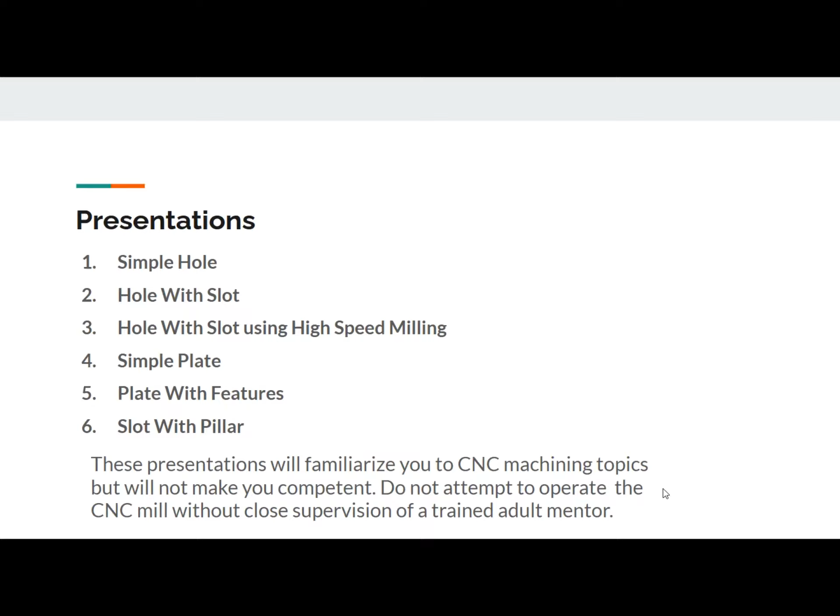So this will be a simple hole with slot. We're going to drill a 250 thousandths diameter hole, centered in a 500 thousandths slot. So the slot's going to have a width of a half an inch, and it's going to be an eighth of an inch, or 125 thousandths deep. This will be in our 2x2 block, so basically we're just adding the slot into the previous example.

We're going to use SolidWorks to add the slot to the hole, and then use SolidWorks CAM to create the CNC code with two features - one feature is the hole, and the other feature is the slot. We're then going to download and run this on the CNC machine to create the part.

So why don't we get on to the design?

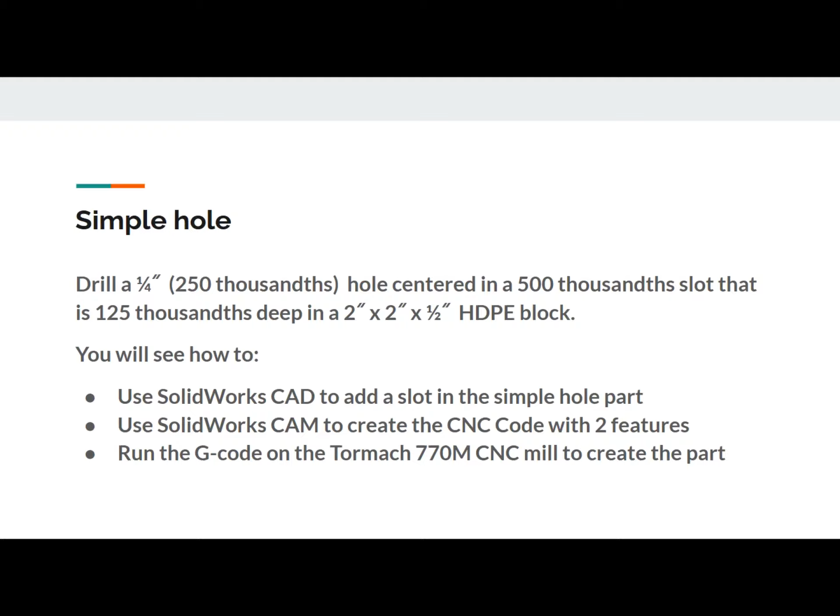We continue some simple examples on how to use SolidWorks CAD and SolidWorks CAM to create the G-code for our Tormach 770M mill. This is where we left off in the last video: a simple 2x2 block, 2-inch by 2-inch block with a 1/4-inch hole in the center of it.

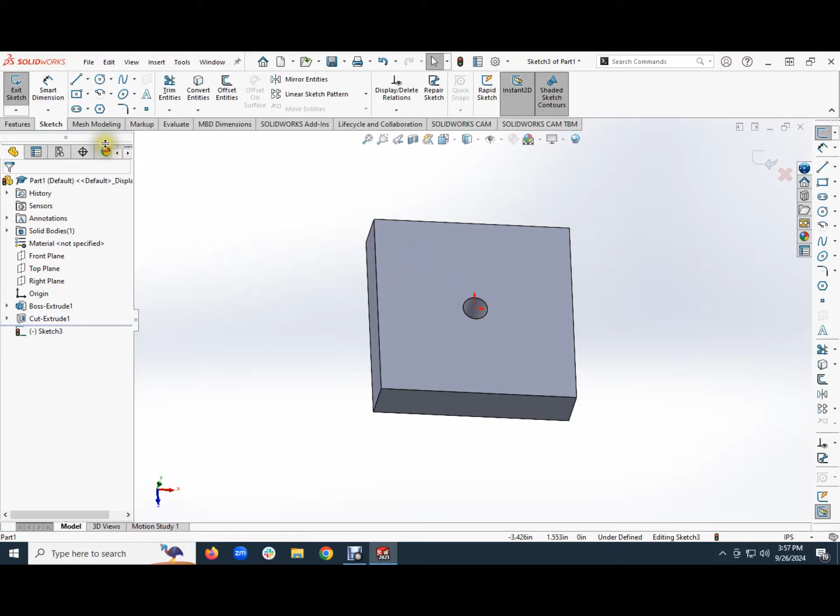Let's get something really complicated - I'm joking here. We're going to do another sketch, and we'll do this as a face. Let me just get it - I always like flipping it up and getting it there.

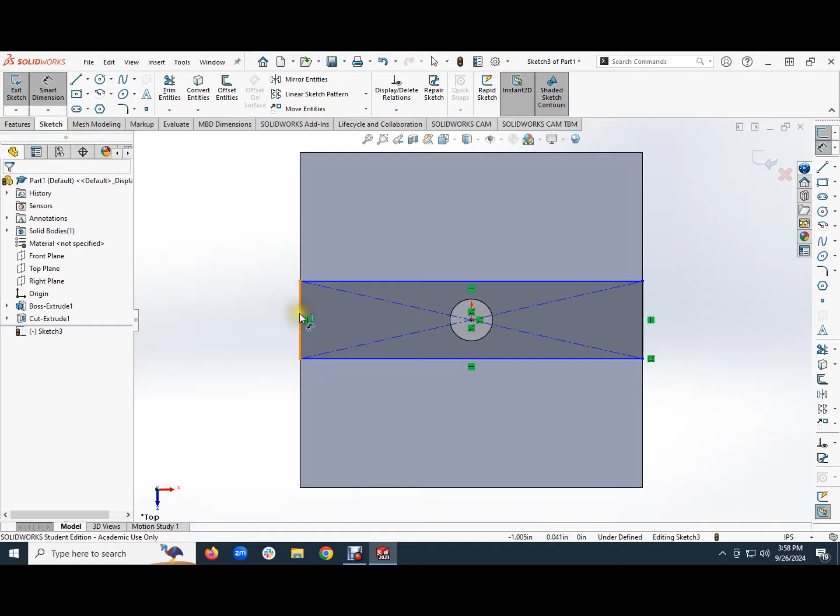Then I'm going to put another rectangle, and we're going to center it - a centered rectangle, and we're just going to put it across here. Let's see, how big do we want this rectangle to be? Let's pick up here - that would be a half an inch, let's say. So the rectangle's a half an inch. So we just did a sketch up here.

What we're going to do is make it into a slot. So I'm going to go into my features, and do an extruded cut. The extruded cut is not going to be through all - let's make the slot... let's go through and make it not a 1/2 inch, but let's make it, let's say, we'll make it 1/8 inch deep.

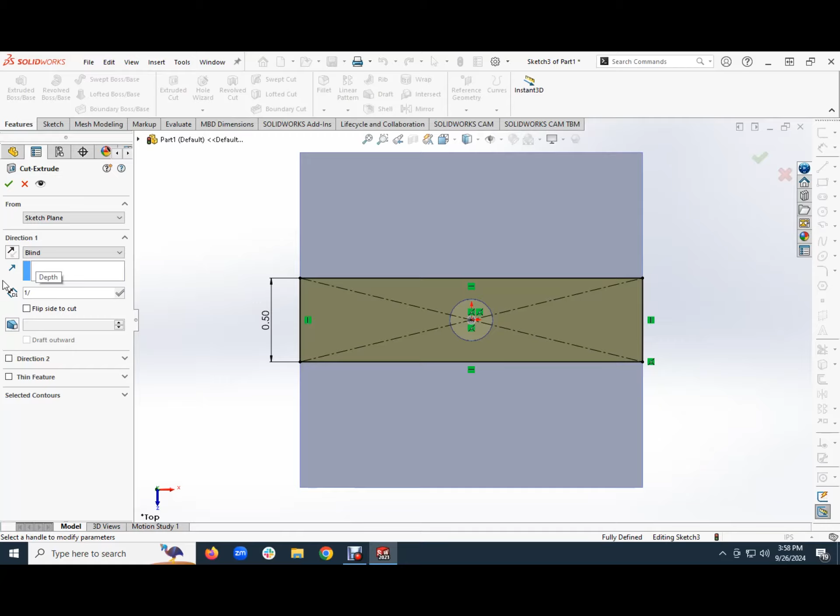So if we look at it now, we have our block with hole and slot. And this is going to be no harder to do than the one with the hole.

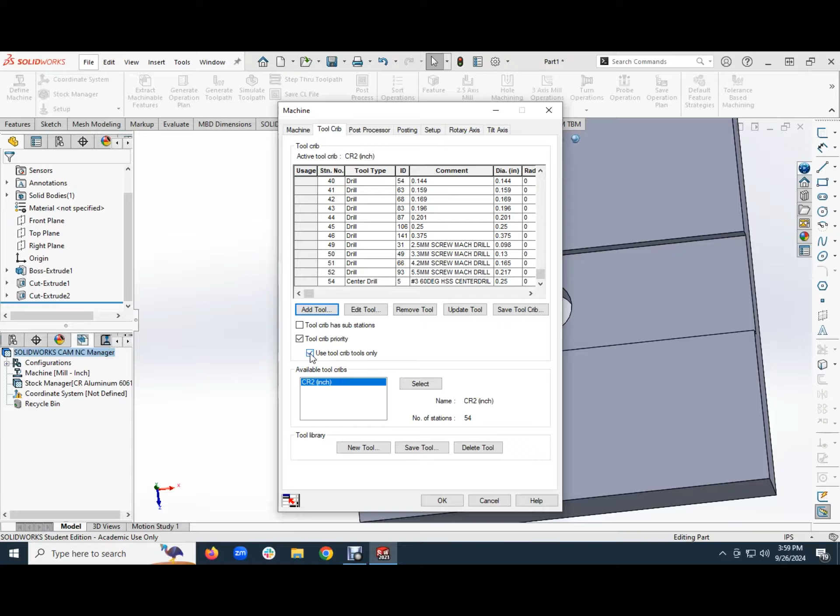So we're going to pick up the CAM, and we're going to make sure that we pick up the history on here, and then we're going to define our machine first. So far we have the machine. Let's go to the tool crib. Whoops, we don't have the tool crib, but if we select here, we get our standard tool crib. And then also remember, we have to make sure that we tell the CAM software do not add tools to our crib, because we don't physically have those tools. So we're going to get that.

And then one other thing is we need the post processor. And the post processor, we go here, and we're going to get the Tormach running the Path Pilot software for our post processor. So we have this, and I think we don't need the other tabs, so we're good here.

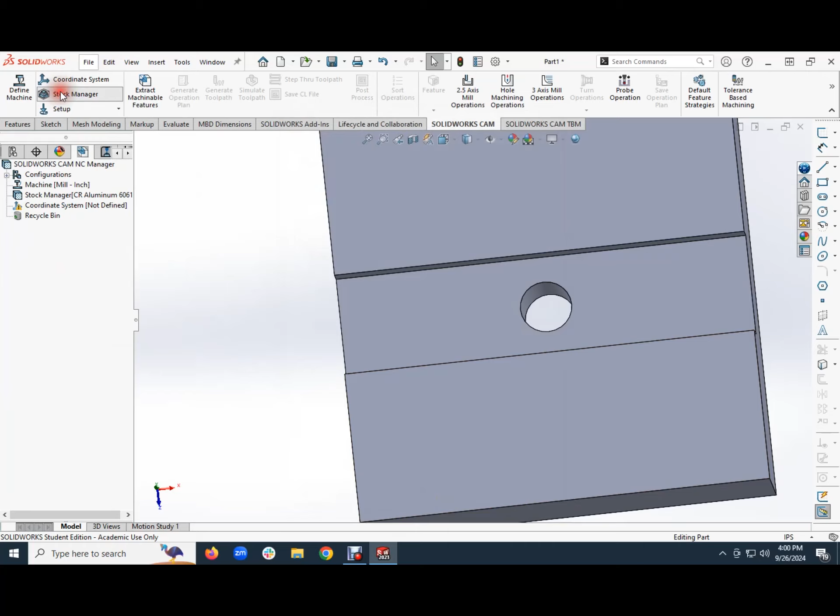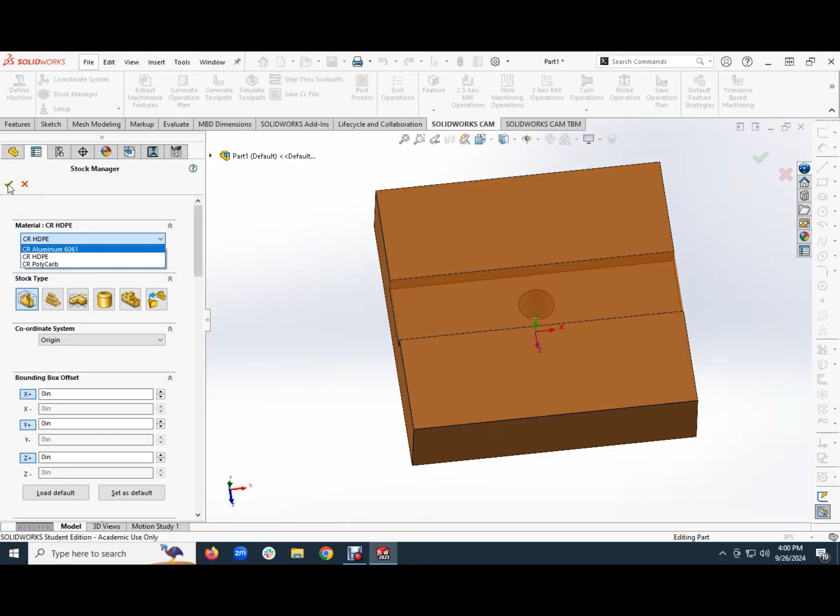Okay, let's go through and see what our stock manager says about this. First of all, we want high density polyethylene rather than aluminum. Notice here that we only have 3 options for our lab: 6061 aluminum, high density polyethylene, or polycarb. It's just to keep things simple for what we do in the lab. And so the stock manager is good. Okay, we're going to select that.

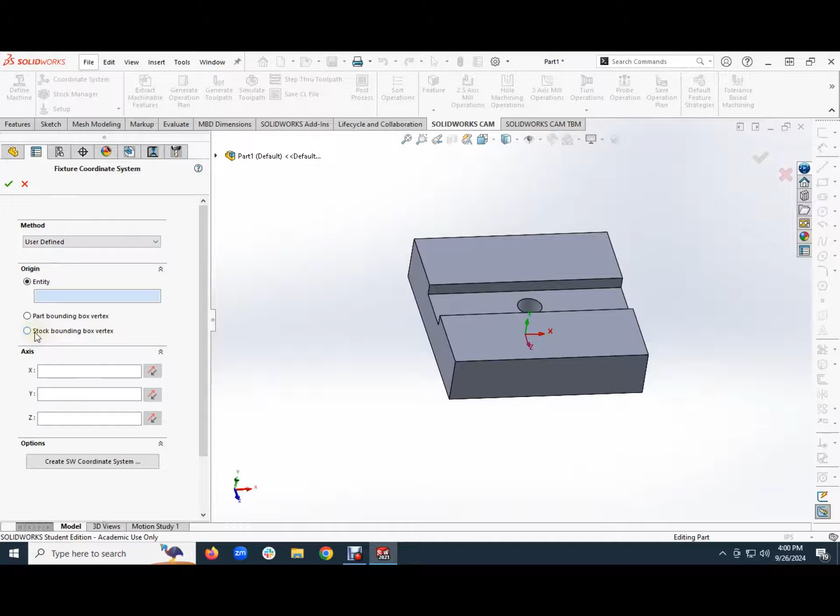Let's get our coordinate system set. As before, our coordinate system coming out of SolidWorks is set in the center. I want to move it up into this corner. So the way we do it is we come down here and see where it says stock bounding box vertex. We click on that, and then we move our coordinate system over here. And remember, the X is going in the correct direction, but the Y and the Z are not.

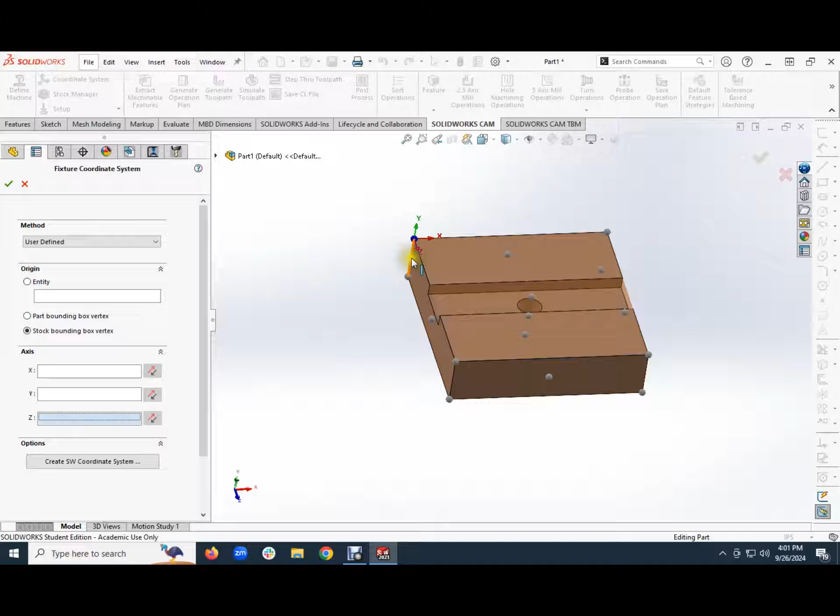So let's make the Z go up. I go down here, select the Z axis, and I want the Z to be parallel to this edge. So I do it that way, and it looks good, except the Z is going down, if you can carefully see it. So I'm going to flip it, and now it's going up. So let's double check it. If I put it in the mill looking like this, I will have the X going to my right, positive X to the right, positive Y away from me in that mill, and Z is positive, pointing up in the mill. So we look like we're good on the coordinate system.

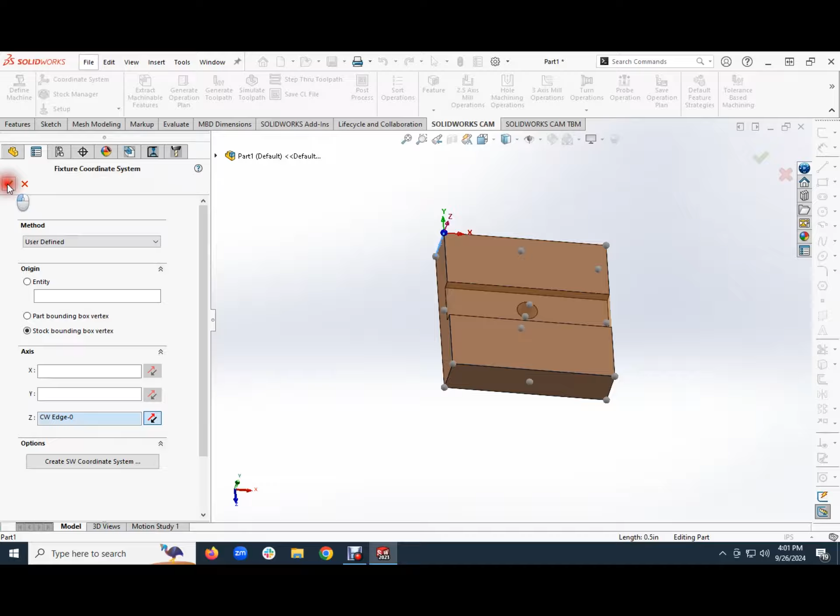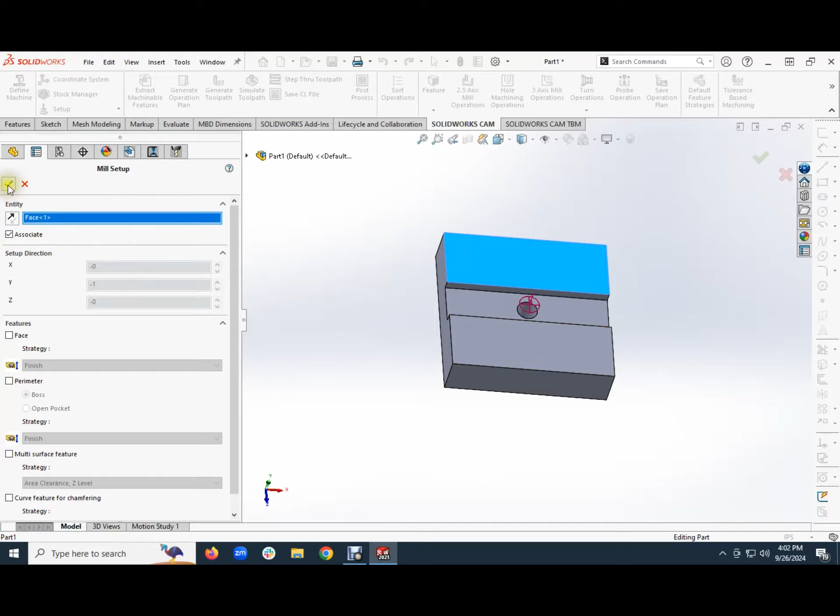Okay, let's do our setup, because we want to tell the mill how we put this thing in the mill, and we do not want the mill to think that the front plane is pointing up. So rather, we're going to tell it that this plane is pointing up. And by the way, we get this face also with it pointing up, so we're okay. So I think we have all the pieces of the setup.

Let's go over here and let's ask it to extract the machinable features. And there should be 2 machinable features: one is the slot and the other one's the hole. Let's see if I'm right about this. And guess what? We have a rectangular slot, and then we also have the hole as we had before.

So far so good. So let's go and generate the operation plan. And notice what it does. It generates an operation plan. This is simple drill, as we saw before, just pick up the drill and then just plunge it in. Okay, but this requires us to do a couple of passes on this.

And so we do a pass that uses a 1/4 inch flat end mill. We do another pass that uses an 1/8 inch, and another pass that does the contour on the 1/8 inch. Now, the trick here is I don't think we need those 3 passes, but let me just go with those 3 passes right now. Okay, and then we'll come back and we'll do something a little bit fancy with them. Okay, so let's generate our tool path. And there's the tool path.

Let's go through and simulate the tool path. It didn't like this tool path. Over here we got this one, we got this one, and we got the drill. It skipped that tool path because it doesn't think we need it.

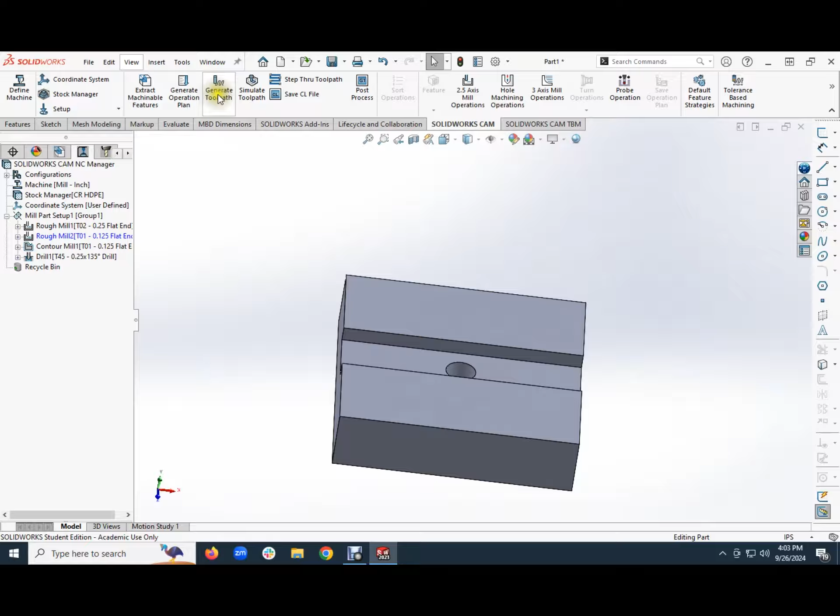So let's see what happens. We're going to generate the tool path and simulate it as we did before. We'll bring this up so we can see the simulation and watch how the tool is going to move around. First we're going to do the rough mill, the two rough mills, the contour mill, and then the drill.

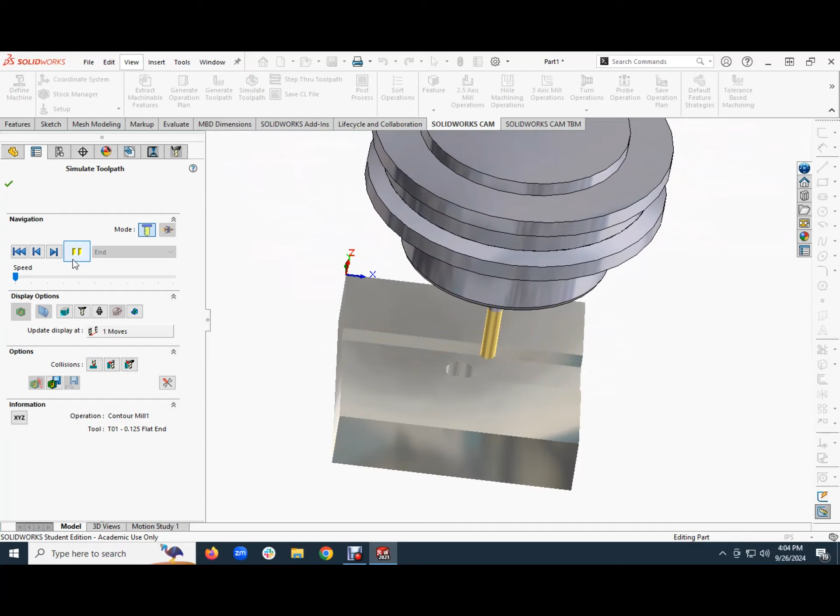So we're going to simulate it. There's the simulation. We have the speed running at low speed, and I'm just going to run it. Okay, that's the first one. It just goes back and forth as you would find in a conventional mill. Here's the contour mill, notice it's using the 1/8 inch, and it's smoothing out those corners.

Now we drill the hole. So it didn't need the middle rough to make this thing work.

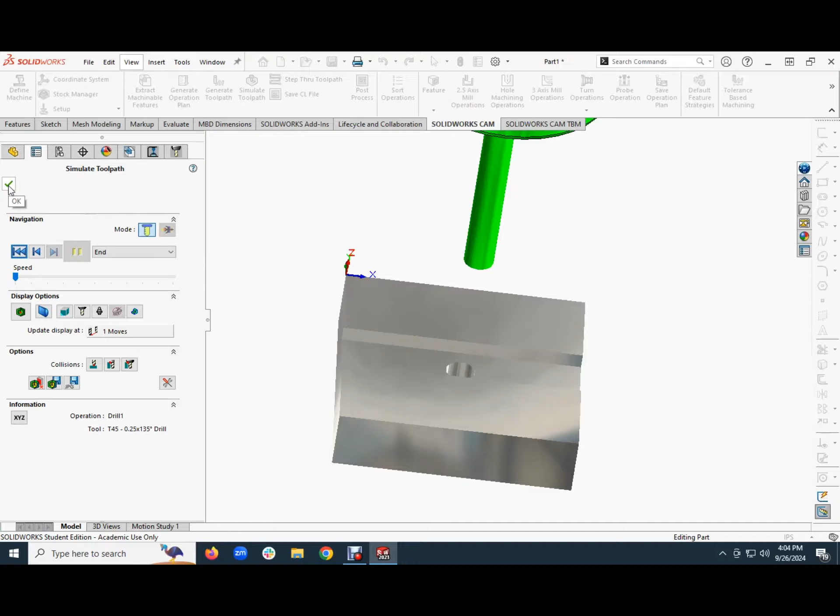So that's good. We can also, because this is actually moving around, do this, and then we could also step through the tool path. So here's the tool path, and it shows us how the tool path is going to behave. This is the tool path that's kind of plotted out for us, and you can see it in 3 dimensions as it's moving through. Let me get it back.

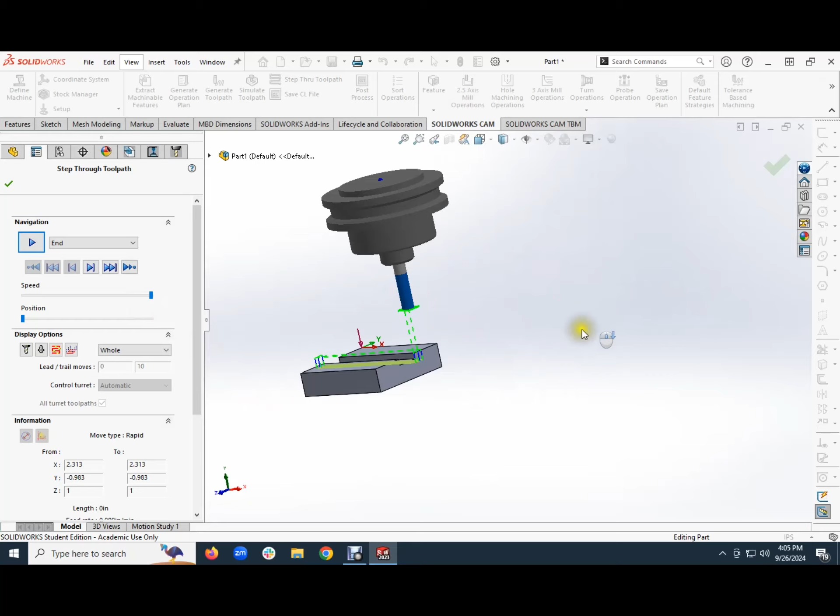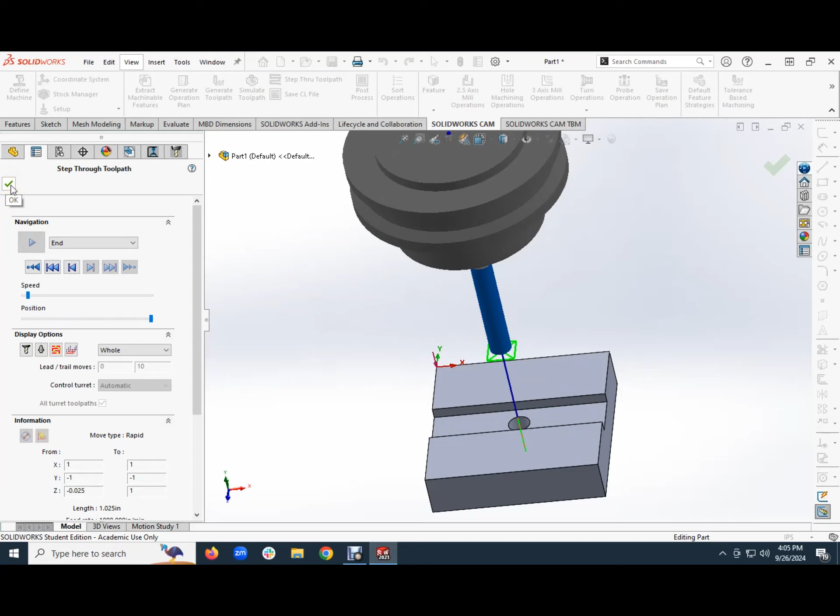Ran away on me. So let's see how this tool path is going to run. I'm going to go at low speed again. And there's the tool path. Zip, zip, zip, zip, boink. Okay, so we have these all drilled out, slotted and drilled. So I feel comfortable with having those.

Now I'm going to do my post-processor, and I'm going to give it a name. Let's see, I always do this. I'm just going to do it this way. This is a simple hole with slot.

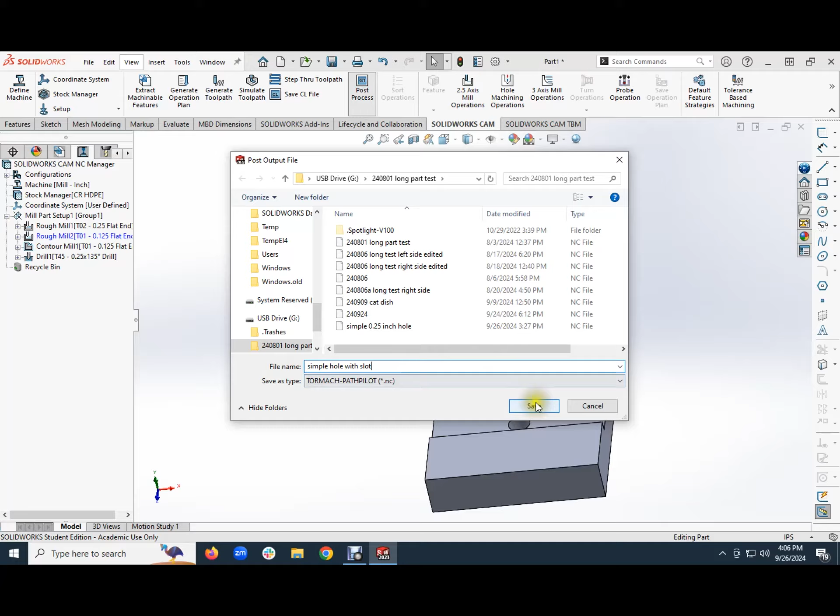This is going to save the G code into that. I'm going to have it produce the G code. There's the production of the G code. This is a lot more complicated, it's 2,000 bytes. So let's take a look at the G code in the editor.

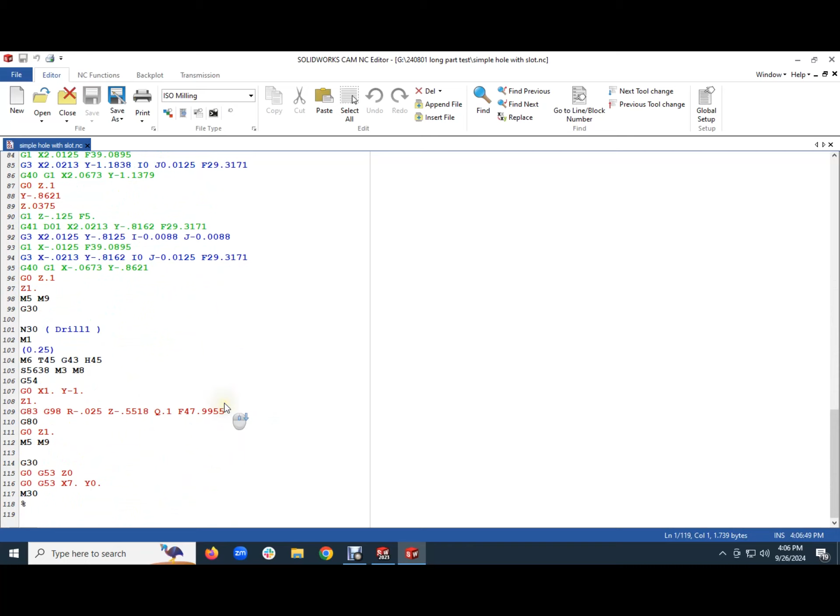This will run in 1 minute and 19 seconds. It goes through, and this basically tells you here's the rough mill using the 1/4 inch mill. That's the first one, and this tells it how it moves back and forth. This is the contour mill using the 1/8 inch mill for the slot, and that looks good. Then here's the drill as we had before, and it just plunged in and did it. So that's basically what we need to make this part.

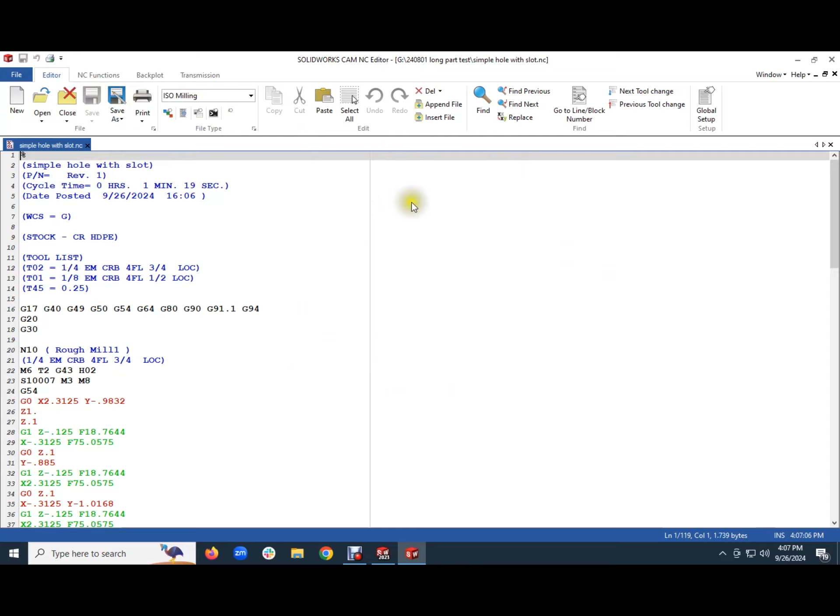So I hope you found some of this familiar, and I hope you're starting to build up some understanding of how this thing works. Bye-bye.

We loaded the G code on the CNC mill and put the polyethylene block in the split vise. Now we're ready to run the G code, and the first thing it's going to do is ask us to load T2, which is that 1/4 inch end mill. So you can hear us load T2.

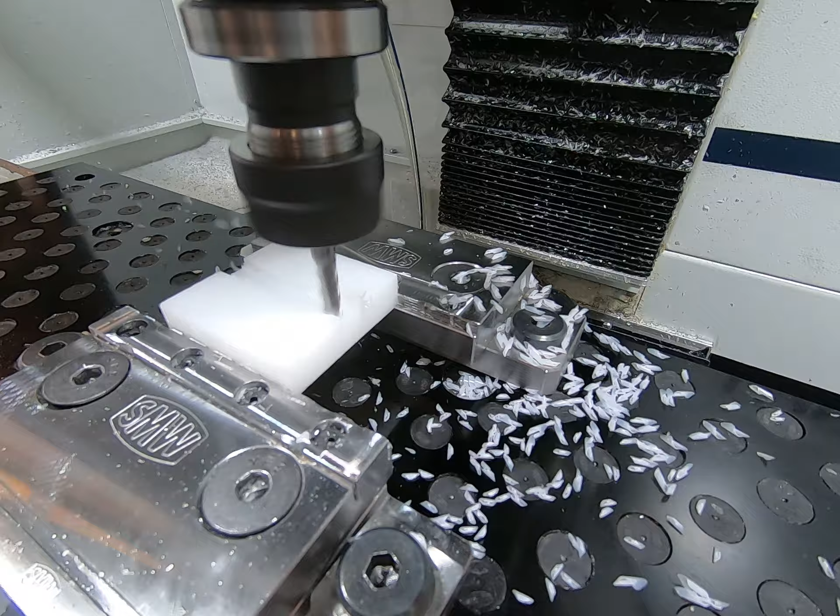Now we push start, and it will do the rough cut for the slot. There's one pass for the rough cut, and there's another pass. We'll go down a little bit deeper. Back up, and then it's paused.

The CNC mill has paused the program, and it's waiting for us to unload T2 and load T1, which will be for the contour mill. There's T1, that little 1/8 inch end mill. We press start again.

Off it goes, and all it's going to do is just smooth out the edges. We'll just smooth out the walls of this slot.

Now the CNC mill has stopped, paused the program again, and it's prompting us to put in T45, which is the 250 thousandths drill, the quarter-inch drill we've used before. Here it is, so we're going to put that in. As soon as it's in, we push start again, and it will finish the program.